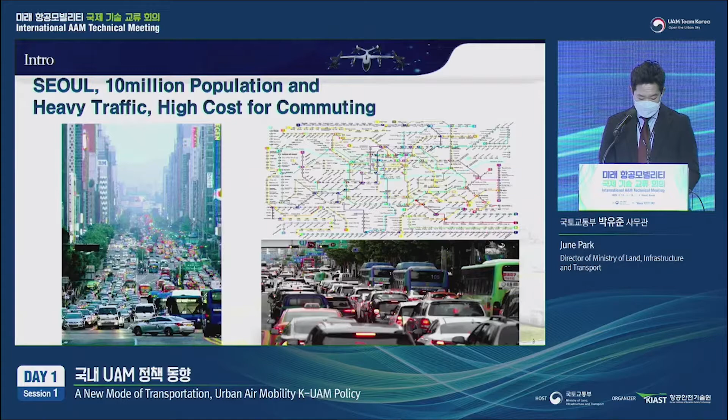So this is what our metropolitan city looks like. As you know, we have very high, very congested traffic, and a lot of complex subway lines, which all contribute to environmental pollution. So how can we deal with the situation?

Maybe, how about we build a new airport or heliport near your home? During the construction, it will create all the noise and environmental pollution. And even if it's built, you will hear all the noise from the flight. So how can we avoid all these but introduce a new mode of transportation?

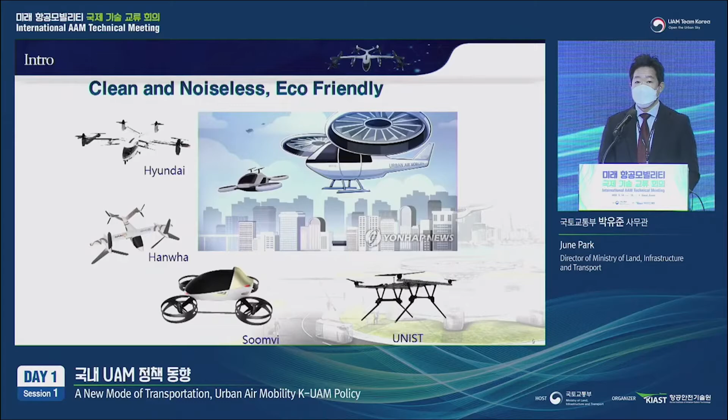That is the UAM. So Hyundai, Hanwha, Soomvi, and UNIST have joined their effort to develop a clean, noiseless, and eco-friendly aerial vehicle. The Korean government has a keen interest in the development of this new mode of transportation.

And as you know, we have strength. Korea has big strength in communication technology, automobiles, and related parts.

So there's vector thrust, the rotor tilt, and there is another type, lift and cruise, and the multi-copter method, enabled by motor and battery technologies.

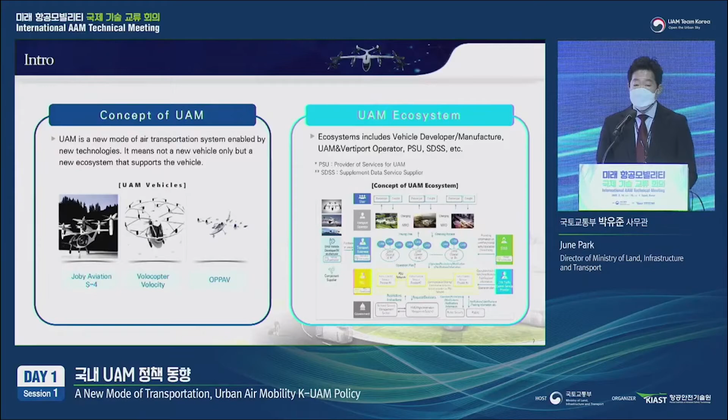So in order to have this UAM as a new mode of transportation, it needs to have transportation functions, and we need to take this into consideration. We need to build a new ecosystem for UAM operation, including the vertiports.

So UAM has been a new concept to Korea, the Korean government, back around 2019. In June 2020, the Korean government released the K-UAM roadmap. Under this roadmap, it specifies the government's effort from 2020 to 2035, and there are some technologies required to make that possible.

As you know, this includes the core technologies and what kind of core technologies should be localized. That's why the Korean government published the technology roadmap in March 2021. UAM is a completely new type of transportation mode, so we needed a completely new manual and roadmap.

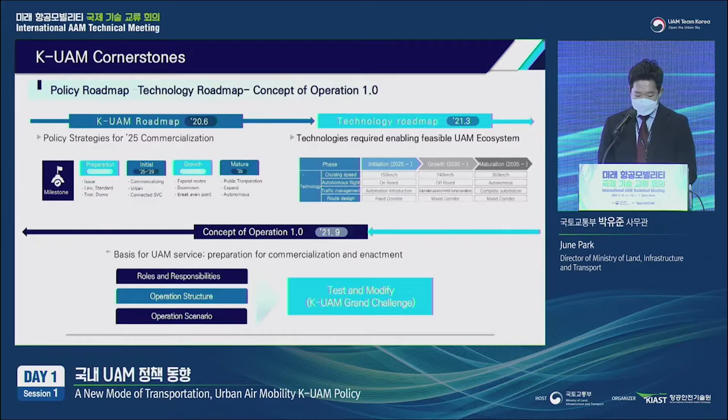That roadmap is the Concept of Operation 1.0, which was published last year in September. The reason we attached 1.0 to this concept of operation is because maybe sometime later we might need to revise it to 2.0. So we plan to test and modify these ConOps.

National governments all over the world are establishing UAM ecosystems, and they are keen on this, actively involved in various kinds of demonstration and R&D activities, including Korea.

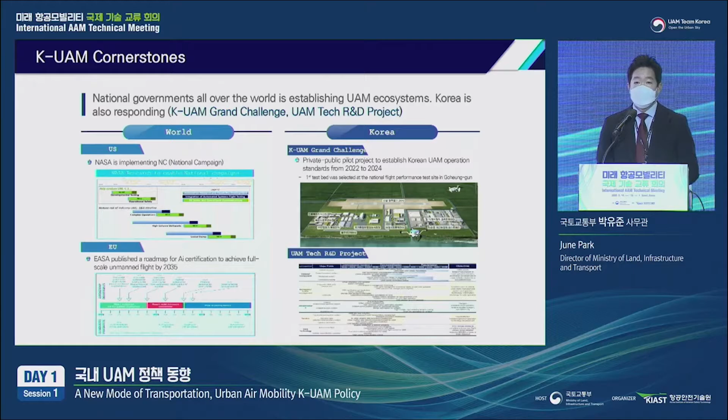We also have this K-UAM Grand Challenge, a big demonstration project, and we needed to go through the pre-feasibility test. We had a challenge last year in order to make this plan more feasible.

We have invited various kinds of related departments and stakeholders to be involved. Our goal is to start commercialization in 2025, and this is a roadmap, and our final goal is to popularize UAM by 2035.

This is the schedule for our roadmap. As I've said, UAM is a completely new mode of transportation that hasn't been around before, so it will take a long time. During the process, we are also planning various kinds of events to increase public acceptance.

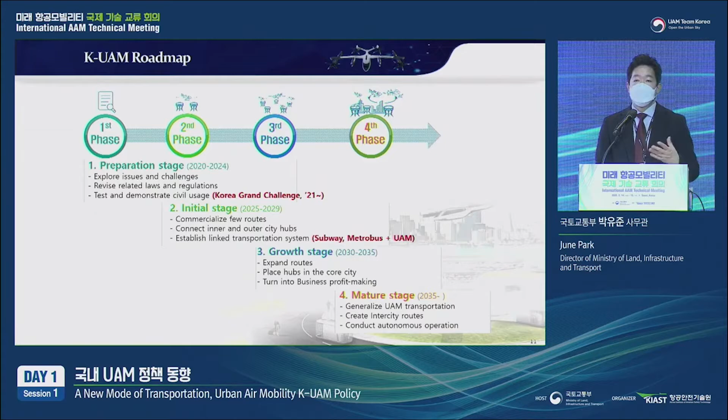And I'm talking about commercialization. When it is commercialized, people need to pay fees to take this UAM vehicle. It might take some time, but over time the passengers for UAM vehicles will increase. By around 2035, when it is completely commercialized and popularized, the usage fee will drop down, which will also attract further passengers.

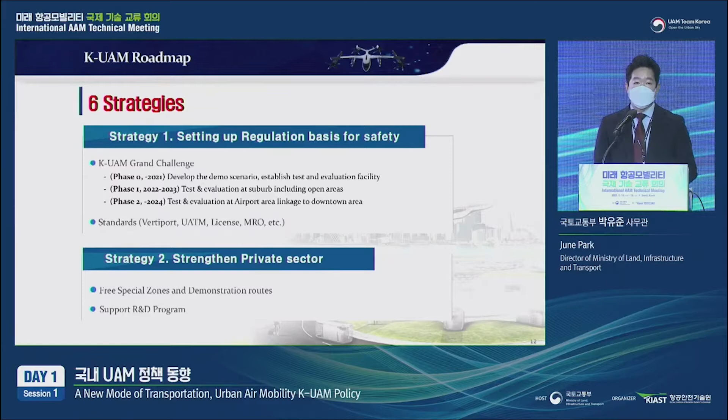So to make this possible, we have 6 strategies. The first strategy is, as you know, if we do not have any system put in place, we cannot attract operators. That is why our strategy 1 is setting up regulation basis for safety. And based on this foundation and framework, operators in the private sector can make this a new sector from which they can earn profit.

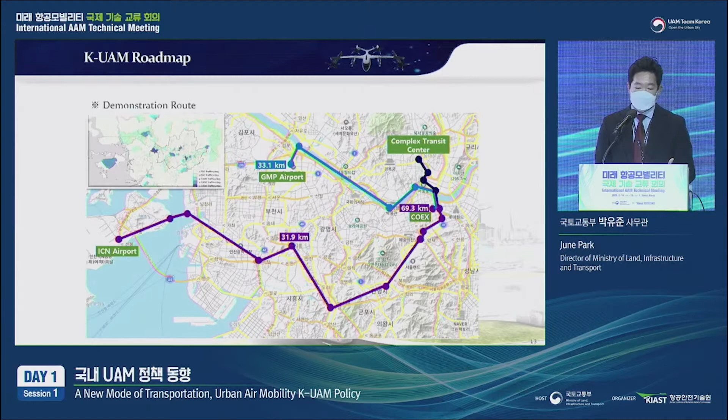Our second strategy is strengthening the private sector, and to do that we need to explore routes that can make profit. This is our demonstration route. It connects Incheon Airport and Gimpo Airport, two airports in the metropolitan city, which can create better profit. To set this demonstration route, a lot of related government organizations have been involved, and their seasoned pilots have also joined in to draw this route.

The third strategy is steps for public acceptance. No matter how hard the government makes its effort to make this possible, if we don't have passengers or users to use this service, it will fail. That is why increasing public acceptance is really important in the process.

But before having this UAM vehicle become very popular, let's just imagine when there's a fire in a high-rise building. Then, to combat this fire, there's a UAM vehicle that suddenly appears to fight this fire. Then people's acceptance will be increased. And we can also have this UAM for military actions, which will also help people increase their acceptance of the introduction of the UAM.

This is also connected to our next strategy, the fourth strategy: creating infrastructure and connectivity. We need infrastructure suitable to the different sizes of UAMs, including small UAVs up to large ones, as well as vertiports.

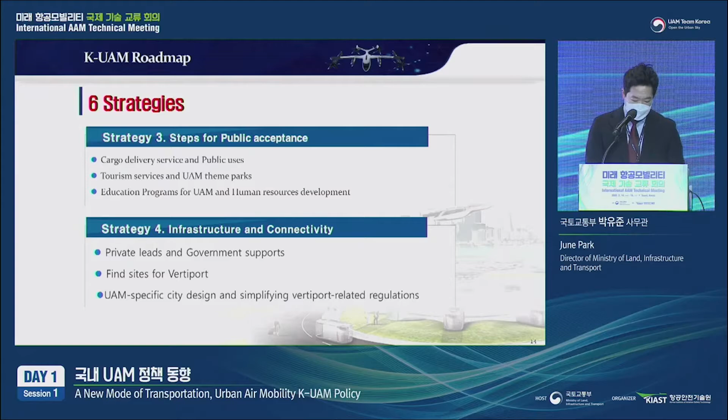In June 17, we will have a special explanation session for the K-UAM Grand Challenge. More details will be provided at that event.

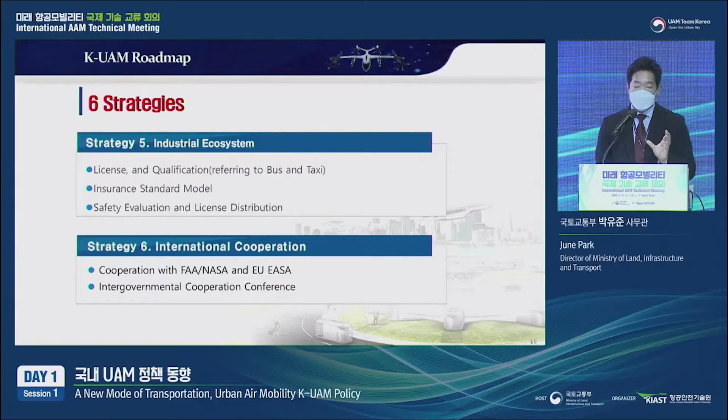Strategy 5 is about the industrial ecosystem. Close cooperation among all the players in the industry is important. And the next strategy, the last one, is international cooperation. It is also essential to have this cooperation with international organizations.

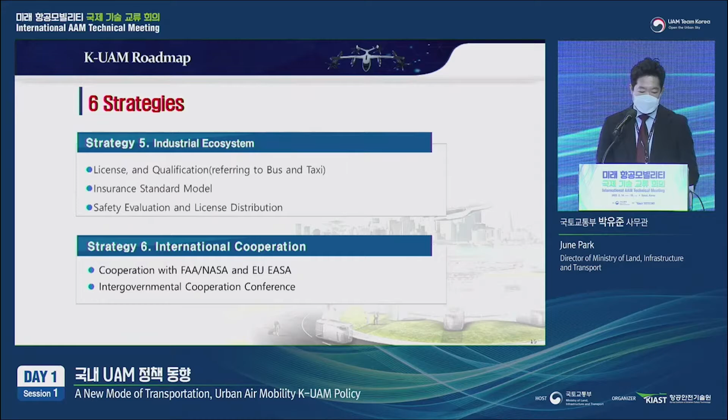Let us watch this about 2-minute video about our program.

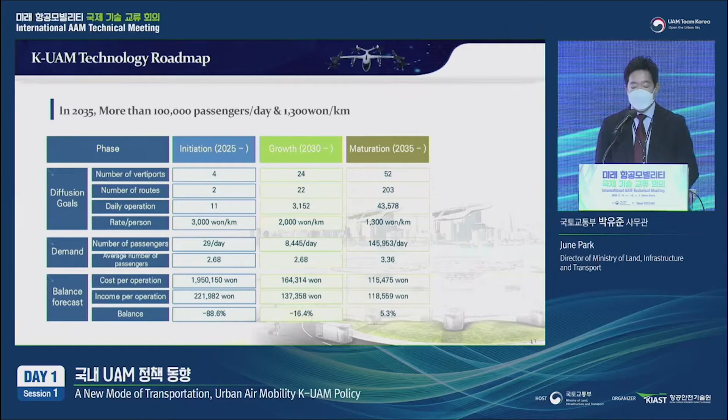As for the operators, at the initial stage they will need a significant amount of investment. But by 2035, they will be able to make profit in this sector. So I have already introduced you to 6 strategies for K-UAM.

And to push that forward, I have listed 5 strategies for this project. The first is about safety. Safety is the key to the success of the UAM service. Second is gaining acceptance from people. Third is cost—it needs to be cost effective. And fourth, it needs to be sustainable because it needs to be around for a long period of time.

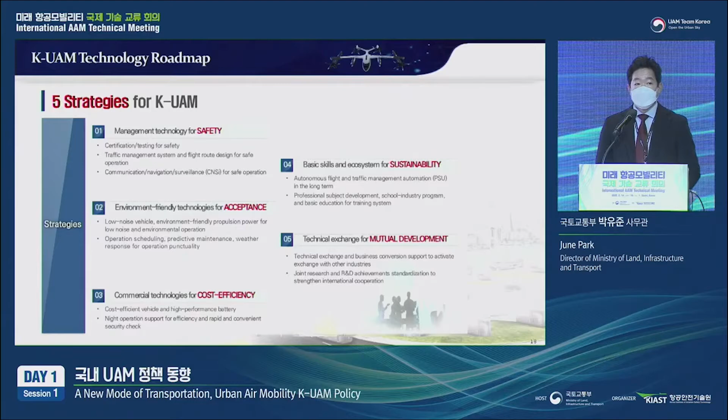And fifth is mutual development and cooperation between private and public. This might seem a little complex. We need advanced technologies to make this possible, including batteries. When charging, batteries can get really hot, so we need advanced technologies to deal with that, and all the related top-notch technologies for flight services. Our ultimate goal is autonomous operation for UAM.

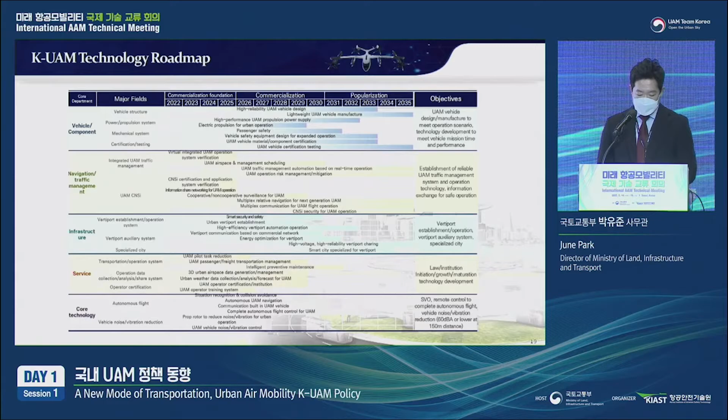So for about the next 9 to 10 years, we will conduct and push forward this project, and our total budget is around 1.6 trillion.

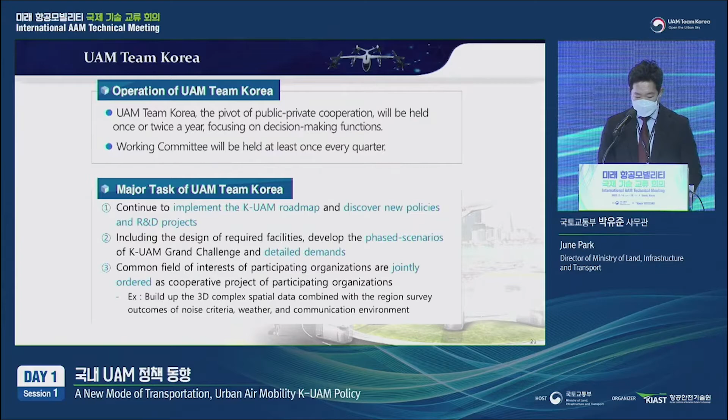Today's event is organized by both UAM Team Korea and MOLIT of Korea. We are closely cooperating with each other to push forward this project, and we are also holding quarterly working-level meetings among us. As I've said, we will be hosting the Grand Challenge, and we are having a lot of collaborations to host this kind of event, sharing common fields of interest among participating organizations.

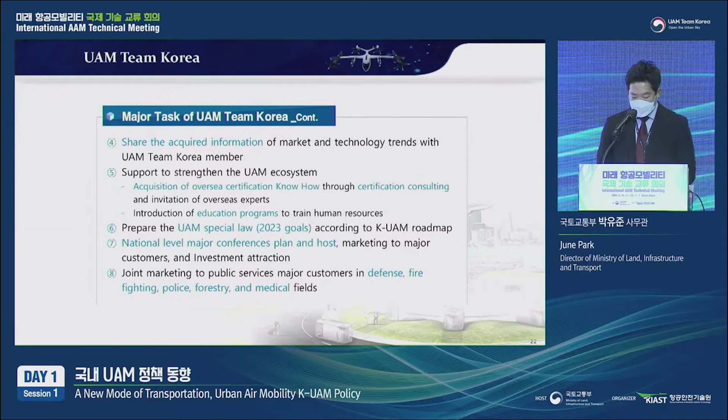We are also collaborating to create UAM special laws, working with many private sector companies including Hyundai, Hanwha, Korean Air, and SK Telecom, as well as key players from academia including Seoul University, KAIST, and others, government ministries, local governments, and related research institutes. Initially, this UAM Team Korea started with 37 parties, but within 1 year it has jumped to 47 participants, and more will come to join our team.

So today, we have given you a copy of K-UAM ConOps 1.0 as a hard copy. Please take a look at it if you have any free time after this conference.

PSU is important, and the vertiport operator is shown in green, which is also important and a key player. The SDSP, PSU, vertiport operator, other stakeholders, ATC, and UAM air operators are all collaborating closely, along with telecom communications that cooperate closely as well.

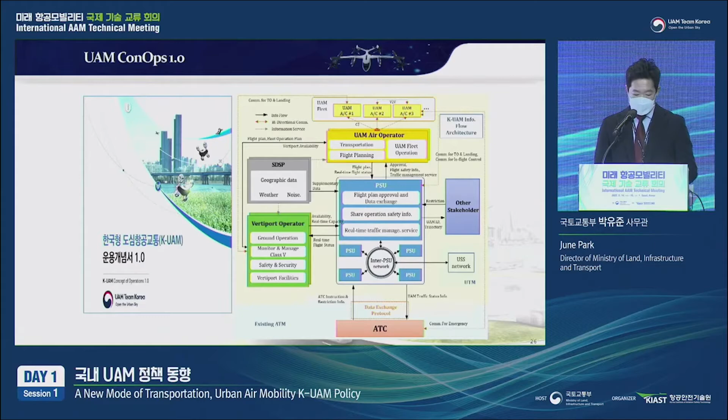UHF and VHF are existing communication channels that let us communicate information with each other, and we will also make it possible to share other related information. But those are existing communication technologies used for existing aircraft. As you know, UAM is a completely new mode of vehicle transportation, which is small, so we need suitable technologies to facilitate communication for the operation of UAM.

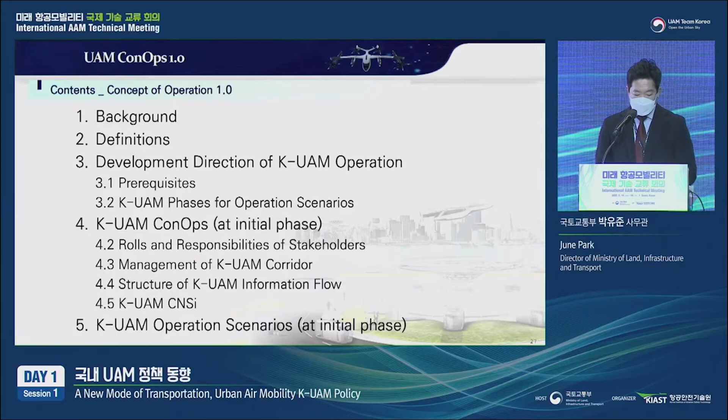As you know, the existing government air traffic controlling office controls the operation of flights flying up to 60,000 feet.

But UAM will be using different corridors. PSU is a provider of service for UAM, along with the UTM service supplier and PSU. Take a look at the PSU, and take a look at the blue and yellow corridors. This is an overall simplified diagram of how our skies will be arranged for the operation of existing aircraft and smaller aircraft such as UAM.

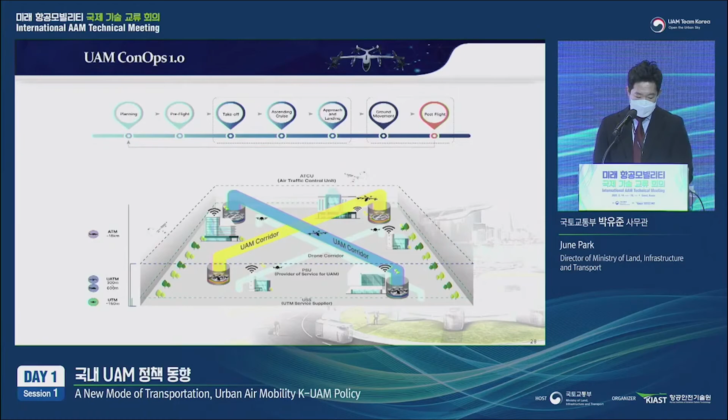That's the Data Exchange Protocol, or DEP, which facilitates the exchange of information between operators. So if there are any changes or challenges when a UAM vehicle is flying over the city, information and data will be communicated to it through advanced technologies.

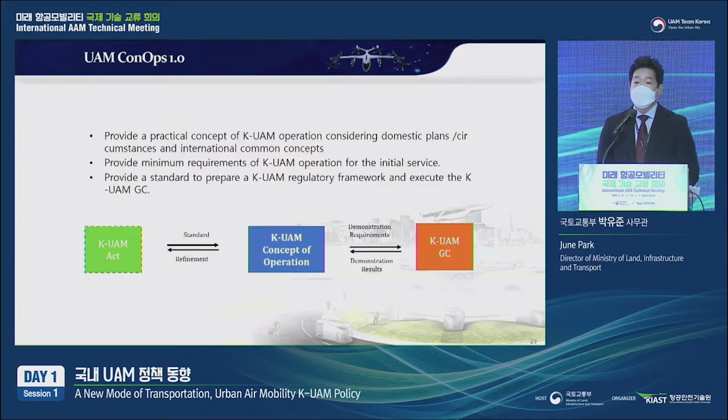So this UAM CONOPS 1.0 will lay the foundation for the related law that is to be established in the future. And as I have already explained, the UAM Grand Challenge will help test and modify this CONOPS.

Let's talk about automobiles. When automobiles were first introduced, a lot of technologies were newly developed over time. The same can be said about drones. So let us turn our eyes to the K-drone system.

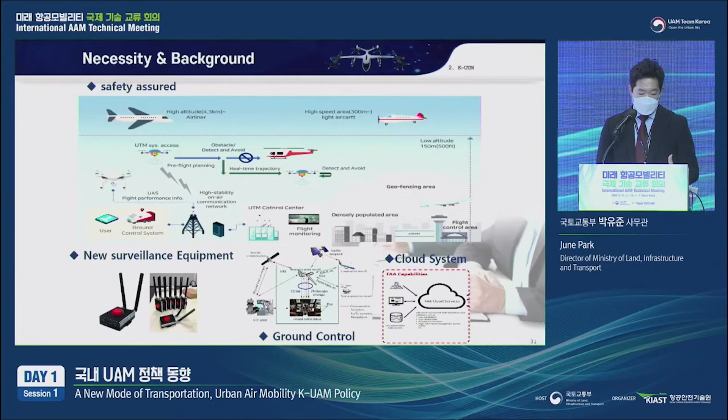With the advanced controlling technology, you would see the types of advanced controlling or surveillance equipment, or FIMS. These are the core technologies of the K-drone system. The Korean government is supporting R&D projects, and it also encourages the public to take part in demonstration projects.

We are collecting information from those demonstration projects, and all the research results will be collected into this FIM system, which will be shared among all the operators or key stakeholders.

So drone and UAM can only fly within VLOS. But over time, in a few years' time, we can expand it further.

Let's say there can be a tree in the way ahead of the drone. So when we set the corridors for the operation of drones, we are not doing it from scratch. We set those kinds of potential corridors based on all the information collected from related organizations.

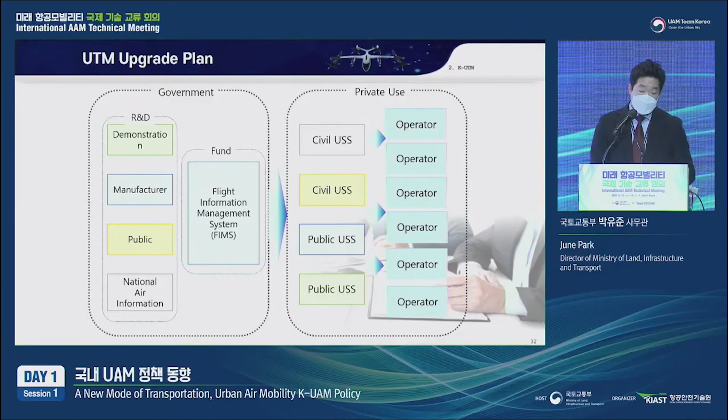To do that, the participation from government organizations is needed, and also the large private companies can take part.

In order to connect the flight, the fuselage, and users, we need a terminal. This is a UTID which can do that. We are at the initial stage for this device. Over time, the device can get smaller and will be easier to use.

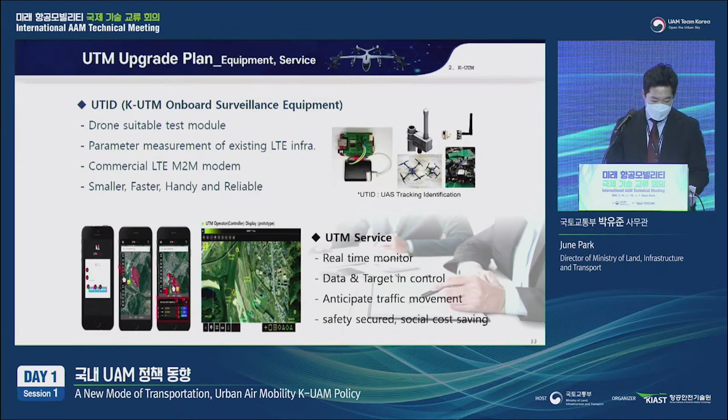In the middle is a UTM. It's the screen that can be used by drone operators. We can make this possible.

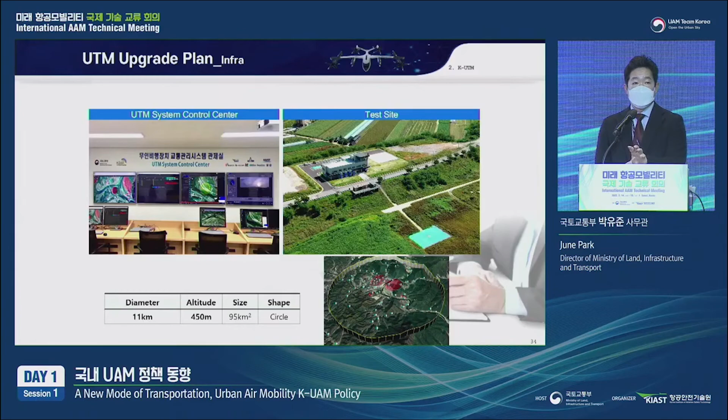Our headquarters is located in Daejeon. But we also hosted tests in Yeongwol in Gangwon, as well as in all places across the country.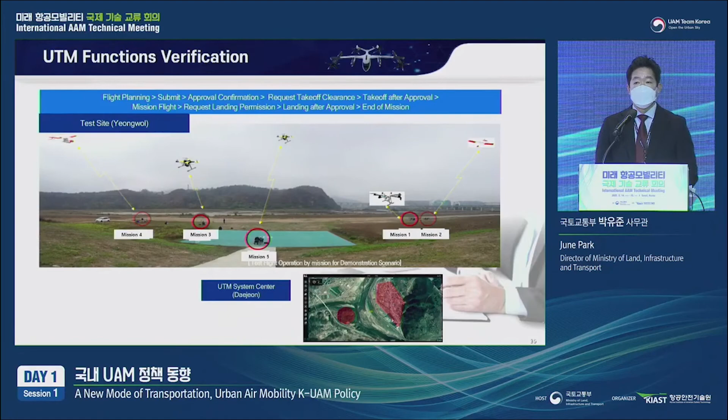Each drone had different missions when we did our demonstration. This is how we utilize the UTM system. We will take this project to the next level around January next year.

Let me share my childhood story. I had this little automobile toy. When I first had this toy, I played with it at home. But over time, I took it outside and played with my friends.

Why I'm telling you this story is it is the same with UAM and drones. These are new modes of transportation, and we are at the very early stage of development, but over time it will be further developed and enhanced.

There's a businessman who tried the idea of using drones to deliver products to users. At the initial stage, the shipping cost was really expensive when not using drones, but using conventional ships. So this businessman started to use the idea of using drones to deliver products that are relatively light, like tiny goods or products. We believe this can be a really great idea.

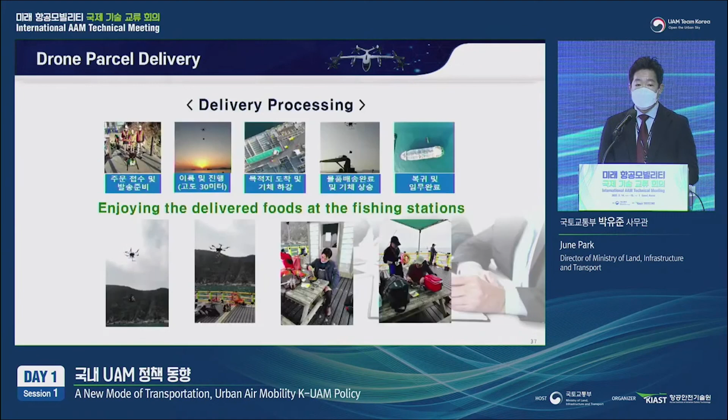The response was really explosive. On our part, we supported companies with innovative ideas like this to expand their businesses. Based on the data collected from all these demonstration and R&D projects, we'll be able to take our UAM project to the next level.

Our initial slogan was 'Open the Urban Sky,' but these days we have a new slogan: 'Into the Urban Sky.'